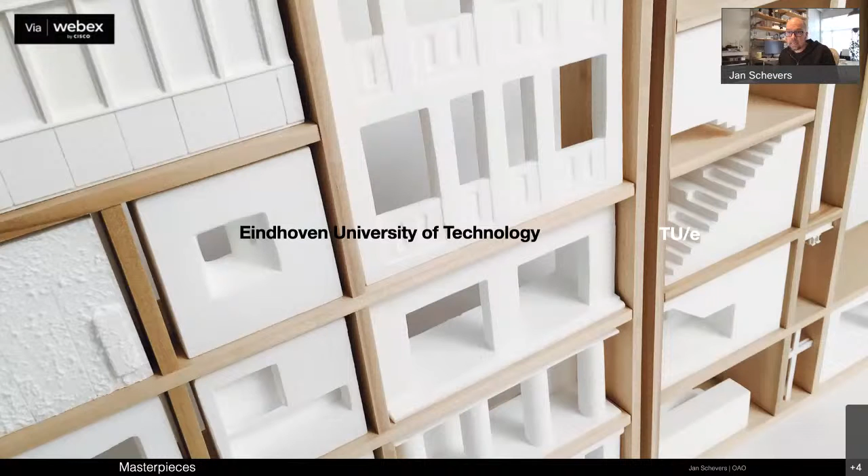This is also something in the background of these two first slides you see: a sort of object I made some time ago, depicting a lot of architectural baggage that I take along with me. This is where I find both my work at the university and my work as a practicing architect come together. My work at university allows me to keep digging into the work of other architects and reflecting on what that means for me as an architect, how I structure my design thinking, but also where I take my inspiration from. This was one of the things I tried to capture with this object you see here, and a little booklet to go along with it.

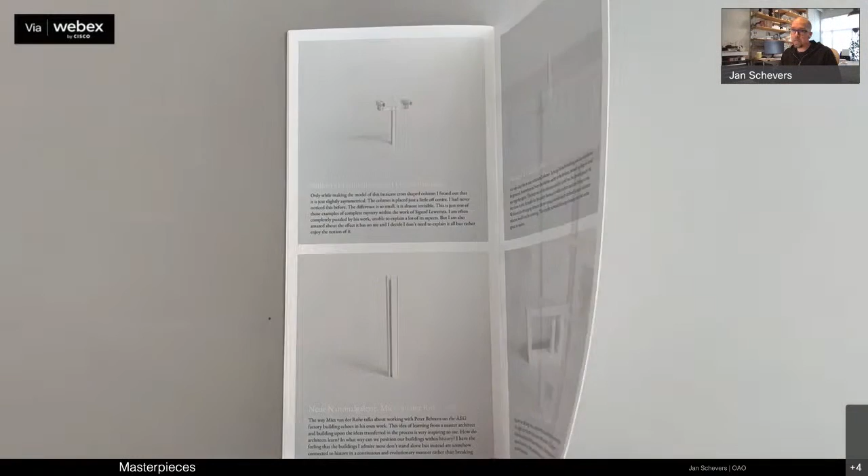It was by invitation of the Architecture Museum in Frankfurt, the Deutsches Architekturmuseum. They got together a group of relatively young architects from Flanders, the northern part of Belgium, and from the Netherlands, and grouped them together under the name of the Weaving Generation, I think it was called. That's also, I saw, in your introduction that you put online, a group that I feel quite comfortable with, indeed these kinds of architects that take inspiration from location but also from others. That's what this object is trying to do, taking fragments of other buildings that I carry with me, of architects that look over my shoulder when I'm designing my own buildings, and that inspire me.

So, for instance, here you can see on the left an image of a fragment of a medieval monastery in the south of France, Le Thoronet, which for me is probably one of the most inspiring buildings that I've ever been to.

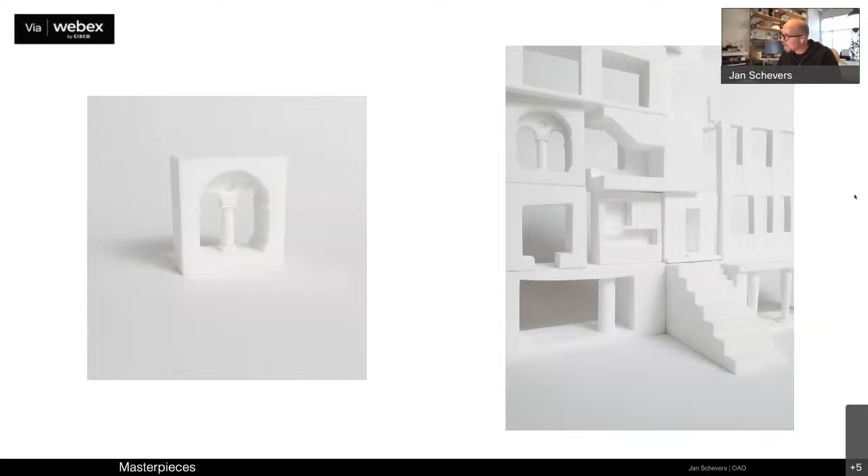But this is combined with, for instance, also one of the columns by Rudolf Olgiati or Peter Märkli, to name but a few Swiss architects.

Expanding on that, this is also one of the things that I love about working together with students so much. This is actually the project that Daniel and I met over, a seminar project, a research project into the work of Rudolf Olgiati, where for me a whole world of inspiration opened up.

Being an architect that, you know, in Switzerland of course all of you know him, but in Holland it's quite different. I think for all of my students it was really the first time they encountered the work of Rudolf Olgiati, everyone knowing Valerio Olgiati, but this was something different.

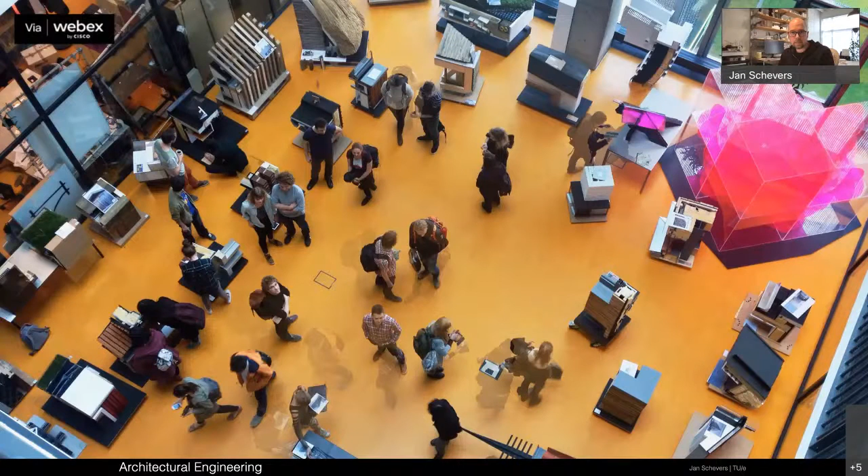Just showing a bit of the work that I'm doing as a quick introduction at the university. This is one of the core courses that I teach, called architectural engineering, and for that students are asked to make a full-scale detail of a fragment of a building such as this, where they redesign that building in a completely circular way.

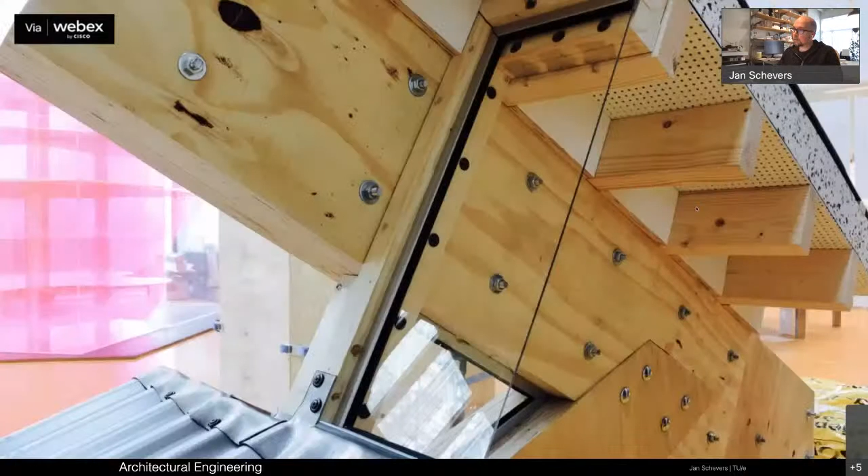So everything is completely demountable, reusable, rethinking every bit of detail, and then in the end also making it at a full scale. For me these are always really nice kind of experiments, also seeing the ingenuity of the students, taking it every year a step further.

This also even led to a giant material bank that we now have at the university, where students can recycle materials from last year because everything is demountable and reusable. Always a really nice, challenging course each year.

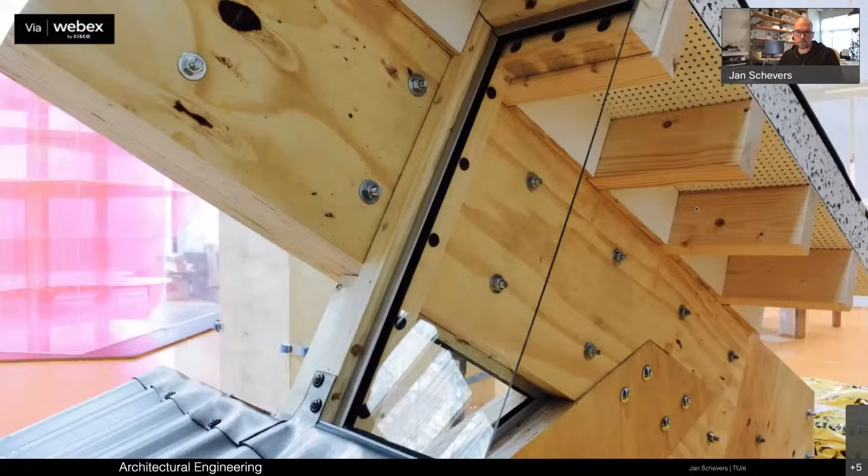Completely different project. This is actually a graduation studio, an ongoing studio where students would come in each quarter, and then other students, after a year, would graduate. So they would also be sort of apprentices or master apprentices to each other. That's also why this was called the masterly apprentice, where we asked students to take one building by a master architect.

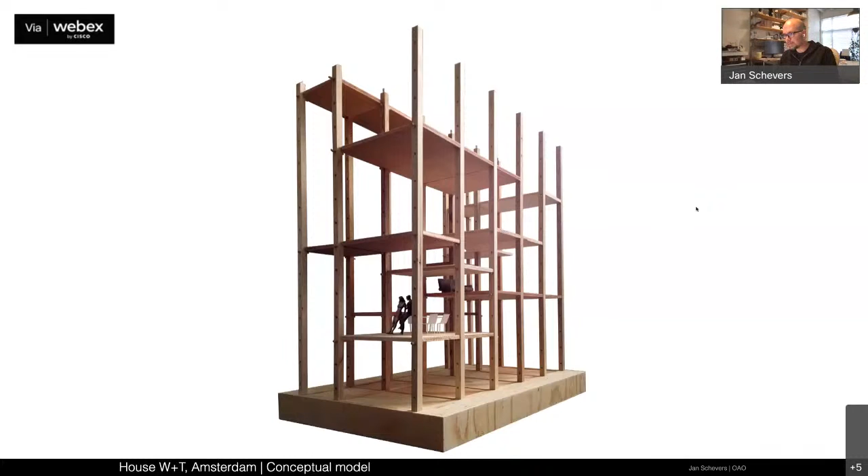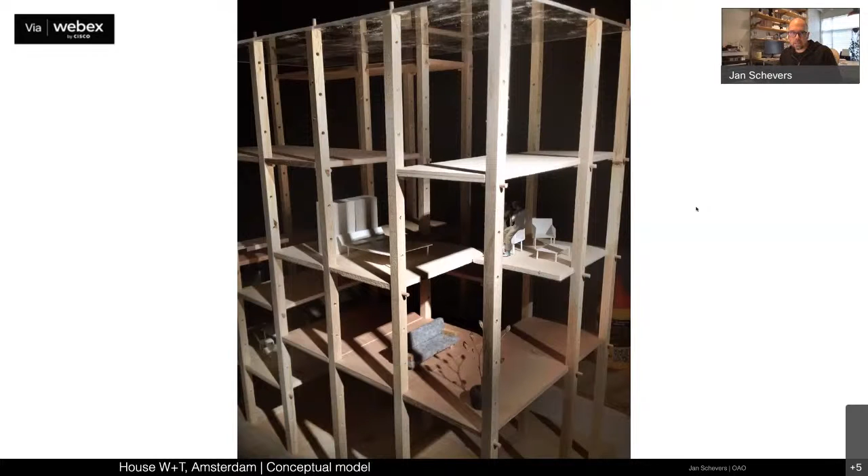One of the things I always do to get to know each other is to put something there. For instance, this one was for a project in Amsterdam for a private house, where we made this kind of conceptual model, because the clients were saying they wanted this very spatial organization in their house—to be able to look from the living room into the kitchen, and maybe to another floor and see people there. So we made this IKEA cupboard or something, and gave it to them as homework, saying, take this model and put your bedroom where you want it, and your living room where you want it, on which level. They started playing around with it, and that really got us the assignment, or the client. From this we started thinking about the structure and how to make it, and then eventually started building it.

Now, this was just a very quick introduction of a house, but it seems, if we talk about the design process, that it's like going from a conceptual image or a sketch, to a model, to a 3D model, and then to an actual building.

For me, it's never like that. It may seem like that now, if I reflect back on that project I just showed in Amsterdam, where it seems like one step after the other, and they all seem very coherent and to have to do something with each other.

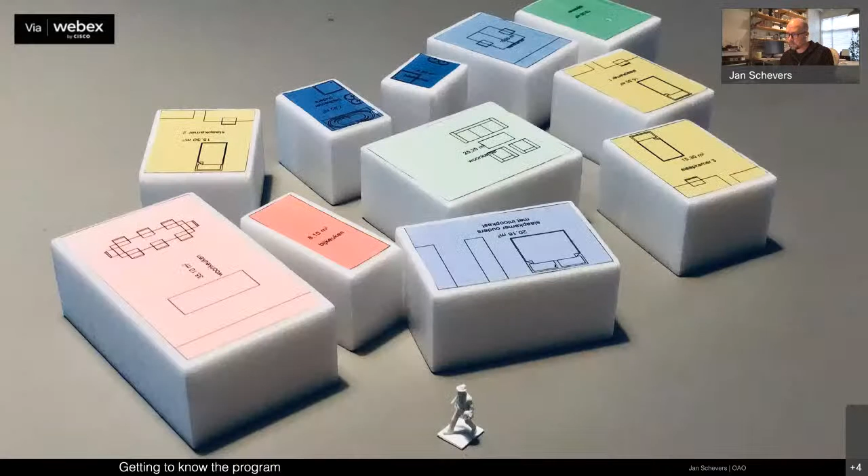So it's getting to know the client, but also getting to know the program—what should be in the house. I always kind of carry around these typical building blocks of a house program: how big is a living room and bedroom, and how big is a sort of kitchen where you can also have your dining room in it.

This is a 3D version of just building blocks, putting together the first idea of a house. Always very beneficial for talking to clients like this, because most clients cannot read a floor plan, let alone a section, but for some reason building with blocks is something they feel very comfortable with, and it comes very intuitively.

So it's getting to know the program, but also the rules and regulations that have to do with that location. In Holland we have this, called the bestemmingsplan, which is really all the rules and regulations having to do with that specific location, like building height and the form of the roof.

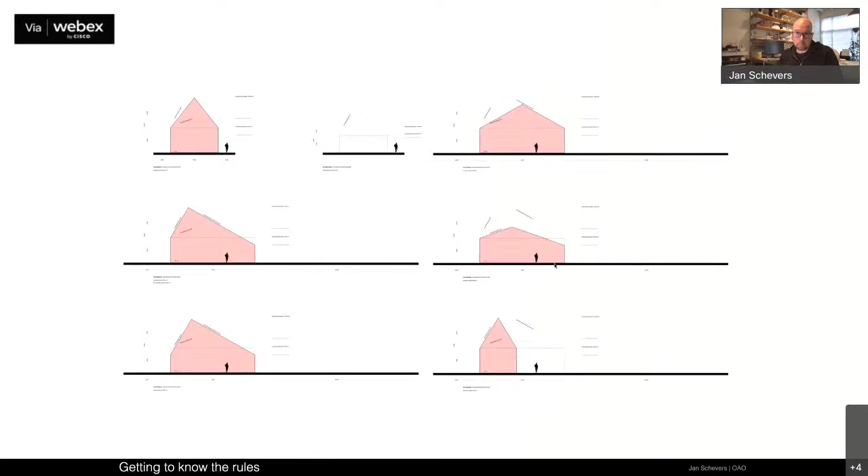I try to summarize all of these rules in these kinds of drawings. Like, okay, in this location it needed to have that kind of pitched roof with a certain angle and a certain height of the eaves and the top of the building. Then by playing around with these rules and with the program, I start making the first kind of sketches, and in this case, sketches really also mean 3D sketches.

Really playing around with foam models, sometimes also with gypsum, sometimes with other materials. But foam for me is just very easy—you can cut it very easily, and it looks quite nice immediately. It's really like trying stuff out in 3D.

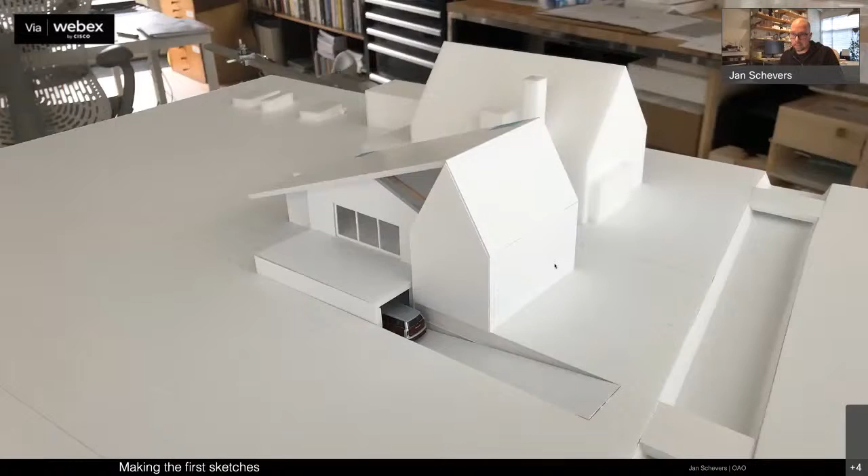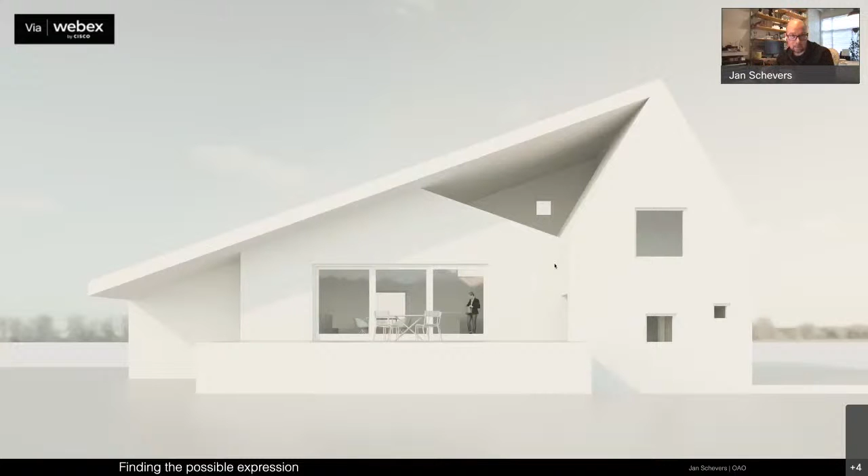In this case, you can even see that with those weird roof shapes the city was allowing us to do, we started making this composition of different houses and putting it all under one roof. You can immediately see it comes really from playing around with that foam board model, which is then translated into a 3D model, seeing what the potential is like spatially, and also being able to look inside and see how the light falls in.

For me, that was also the moment when, after our first talks with the client, this was the first time I started presenting them with something of a design.

The nice thing about private clients is that they're very direct, based on their gut feeling or intuition, and that's something I stimulate. In this case, though, this was their first reaction: they said, no Jan, we really cannot see ourselves living in it. You don't even know why, but in this case the response was not good.

This was actually a really good thing for the project, a bad thing for him and his family of course, but for the project it was good, because it meant that where we first had this plot—which was really hard to build on, since the north arrow points this way—and as it is also in Switzerland I'm sure, it's quite important to make the most use of the sun coming from the south.

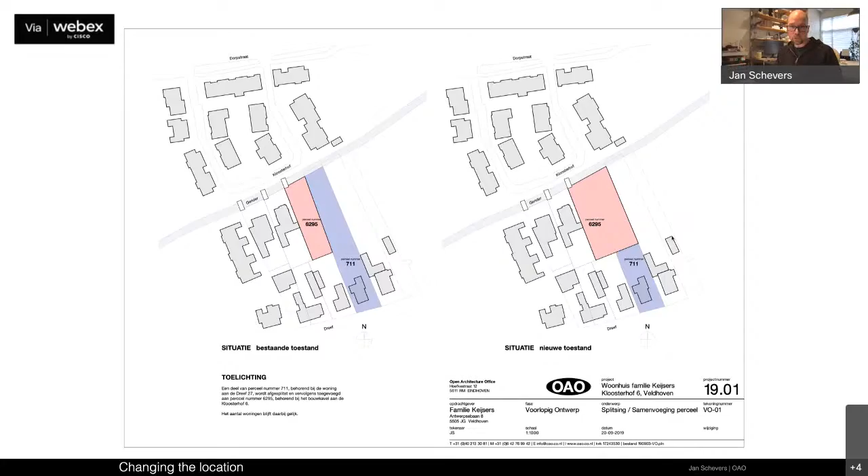So they did that—immediately tore away all of the fences and greenery. It also opened up the plot in a different way for approaching the building.

So basically, I could start over again with the entire design process, which wasn't a bad thing because we weren't agreeing, or we hadn't found the right approach to the design anyway. They weren't happy with it.

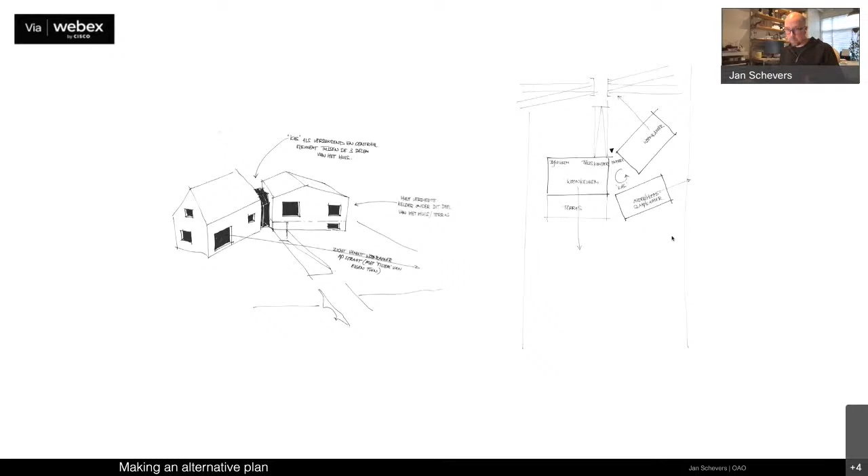So I started just sketching, seeing what you could do with the new plot that was given, maybe with multiple houses. I think I was still kind of stuck in that idea of the pitched angle of the roof and having these multiple blocks coming together, now in a completely different way.

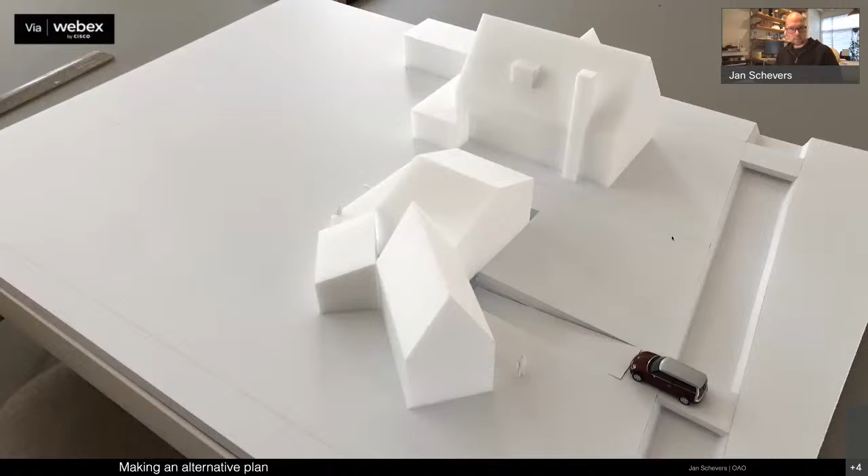At a certain moment I tossed that aside, saying okay, maybe it should be something completely different—something like this, which also follows all the strict rules and regulations from the city, where mainly the low gutter height was really a thing that kind of bothered a proper design.

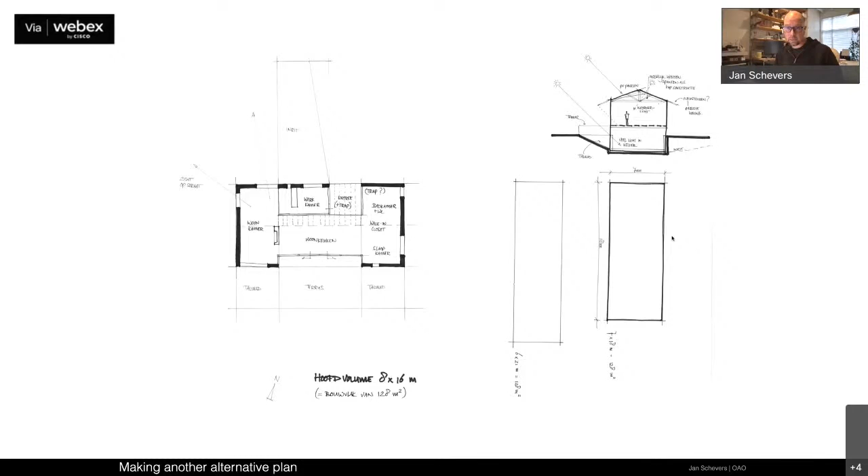Then also sketching in floor plans, but especially in sections, is something that I always love to do, just exploring the spatiality of it. And also these renders, seeing like, okay, what can we do with the quality of the interior, and then what is the relation from the inside to the outside.

Also working with references, this kind of reminded me of a project that you'll probably also be well aware of, which I found really nice to strive for, something like this. Again, going back to the clients, seeing how they would respond to this. And no, unfortunately, this was really not up their alley. And they were like, no.

Still nothing to go on. But the nice thing of this is that it gave us, at least now I know what they're not looking for, and for me, it also didn't fall into place yet. So it gave us kind of like this dot on the horizon or something. What are we looking for together here?

This also coincided with my holiday. That was really up until the moment that I was working on it, just before going on a holiday. And then they said, no, let's not do this. And I thought, okay, then let's take a holiday, let's take a break and start afresh.

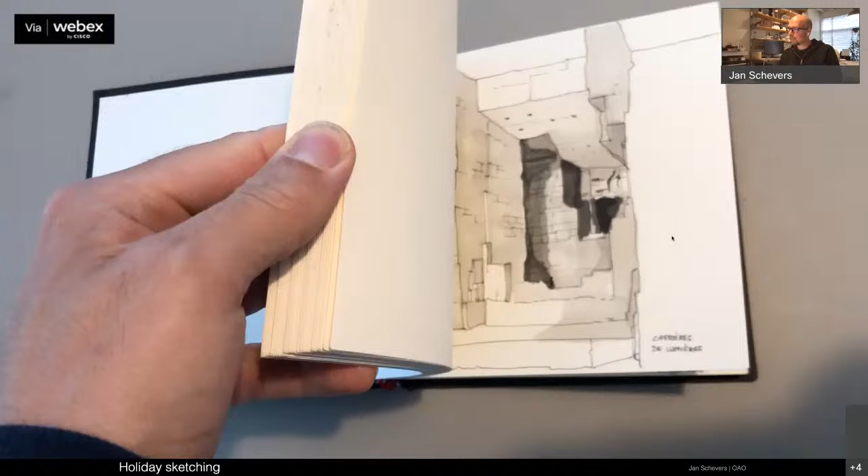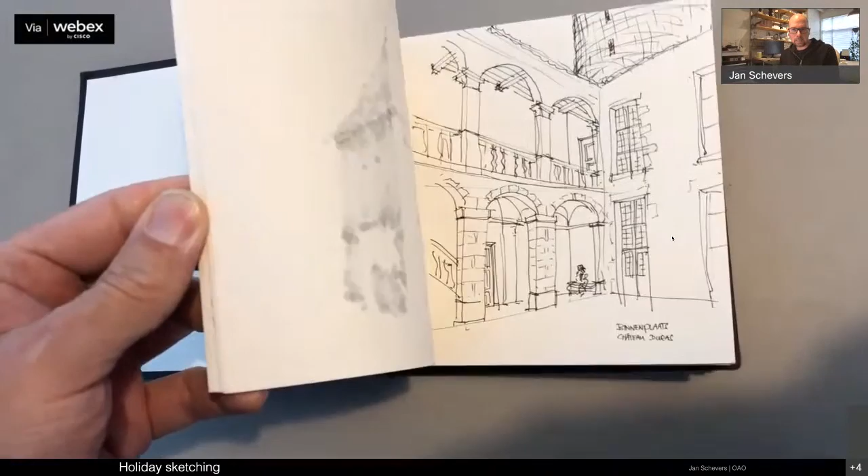One of the things that I always like to do while I'm on a holiday is to make these kinds of sketches. Everywhere I go, I start drawing what I see, and it really helps me to look in a different way at stuff around me. But it also opens up my mind, I think. So in this case, I also took along my sketchbook, and sometimes to the dismay of my wife and daughter, I'm always kind of working.

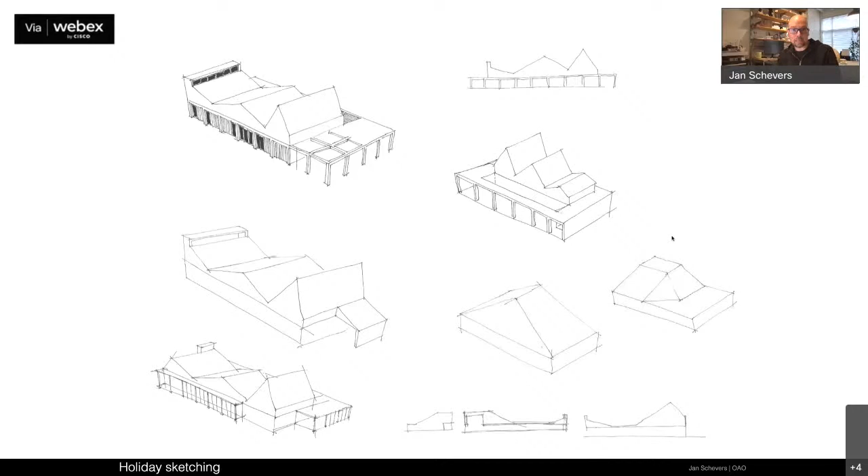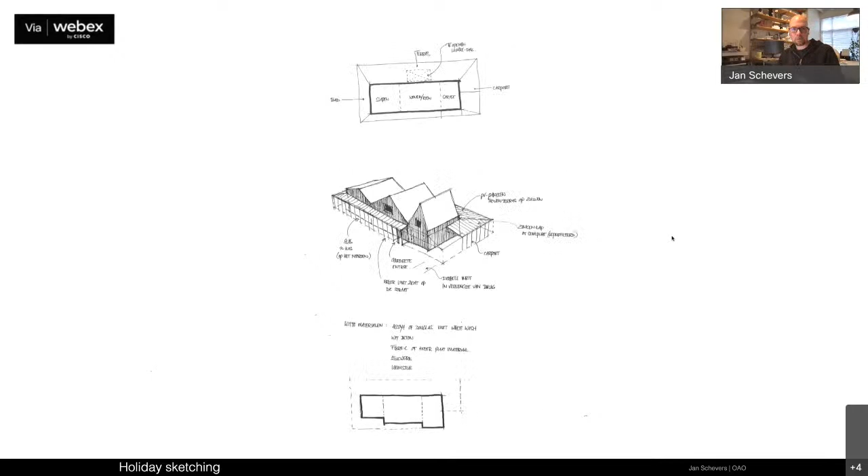Well, not always. I also have a lot of fun, but working for me is also a lot of fun. So sometimes it's really hard to let go of these kinds of, especially when I'm in this kind of zone of getting my thoughts on paper. And so I produce like a ton of these sketches while I'm drinking wine in the south of France, in this case.

And now looking back at these sketches, I can see something happening there also, where, for instance, like with these ones, there was something very personal to the client coming into the project, which you can recognize quite literally, like these greenhouses. So I figured, let's take really the passion of the client and make it into the heart of the building, place the greenhouse really at the heart of the building.

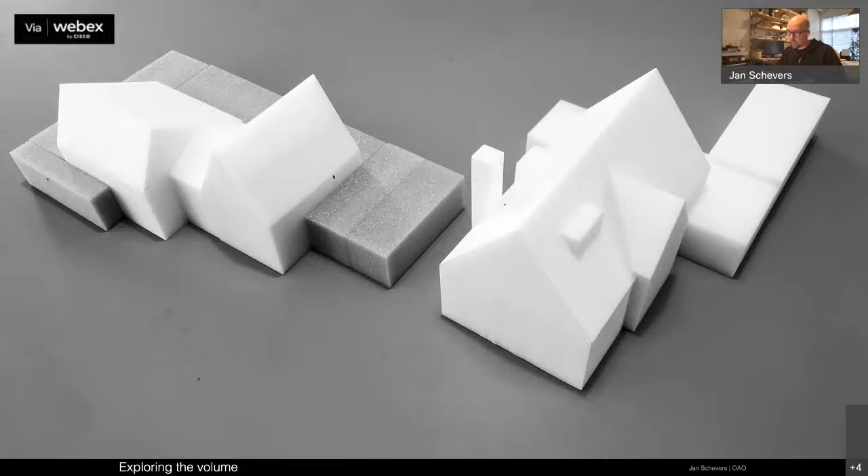And that was something that worked really well in terms of floor plan, where you can see like a greenhouse here, kind of organizing the entire floor plan around it. But also it started to do something, and here on the right is the existing building that was next door. This could be something of the arrangement of the new building.

A little worked out in a bit of a different way, where the silver part would then be the greenhouse. And this was actually the model that I then took to the client. And by now I was getting really nervous. Like I was thinking, okay, but this is now becoming something that I feel quite good about.

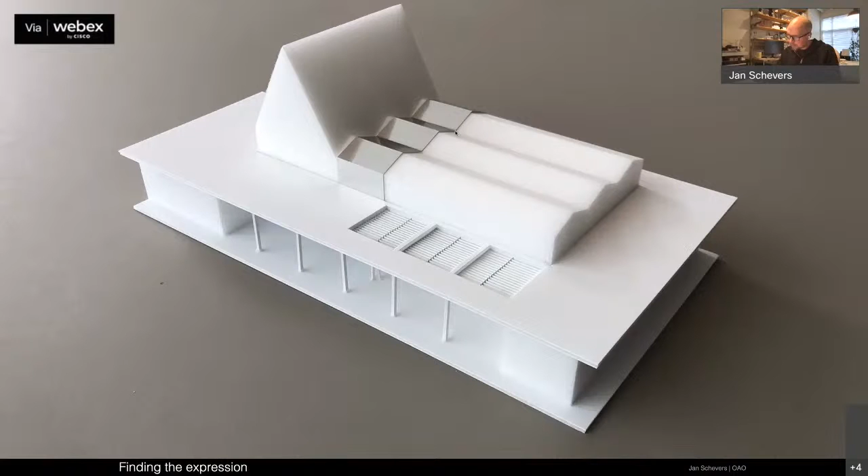And that I have a feeling that we're somewhere now. And so I was really nervous to show that to the client. And their response was just, yeah, that was spot on. They were really like, now you've found really what we're looking for. They didn't even have a clue what they were actually looking for, but for some reason it all kind of fell into place, essentially.

So that meant for me to start working on these kinds of models to check, okay, what kind of building is it then going to be? Also to check whether what that's going to do for the interior. And this was something that I was also not completely happy with. So I tried to also remain very critical, even if at a certain point you think, now finally we have like a way to go, or a kind of conceptual approach or something. Then still I try to be very critical of, hey, what am I doing, and is this really working?

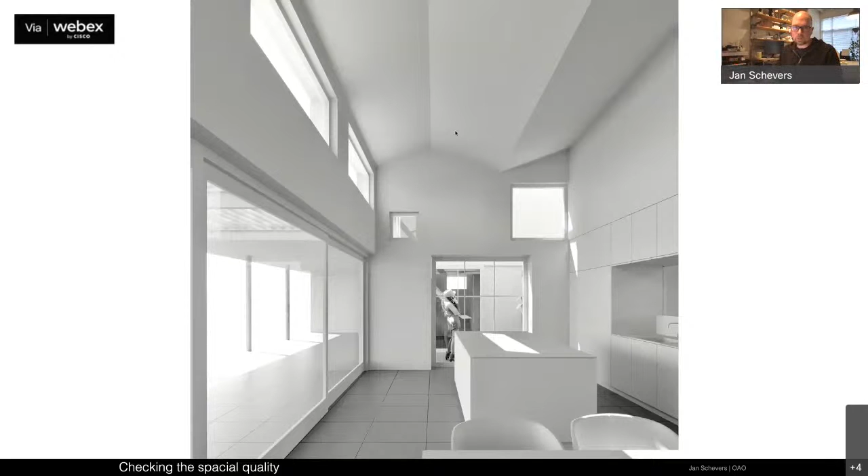So in this case, the spatial quality of this is the kitchen / dining room. That wasn't falling into place, where I thought that, and then I start experimenting with it. What does that space do? What should the roof do? How do I want the light to come in? And that's where also these kinds of 3D models help me out a lot.

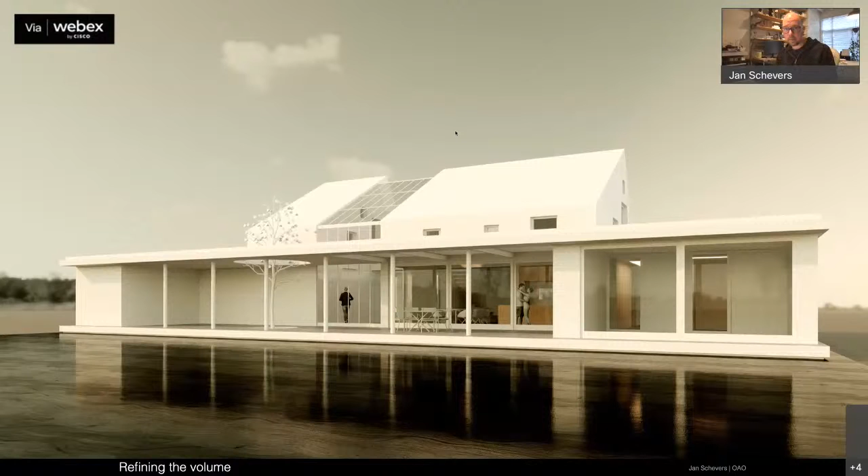Also to check, what does it do towards the garden? In this case, opening up the building. This is also something that the client wanted very much, like this in-between space, where they could sit outside also long evenings in the summer or late summer or even autumn.

They loved sitting there with a group of friends watching the Tour de France. That was really like a dream that they had, sitting on their porch watching guys riding their bikes down big mountains.

Then seeing how that would work with communicating to the front, and then with that greenhouse in the middle where also the entrance is going to be made. This is really where everything started to fall into place.

So I start making these kinds of drawings, because besides working with physical models, everything you see is really the 3D model. In my case I use Archicad for that, so all of the drawings I'm going to show are also just versions of that 3D model.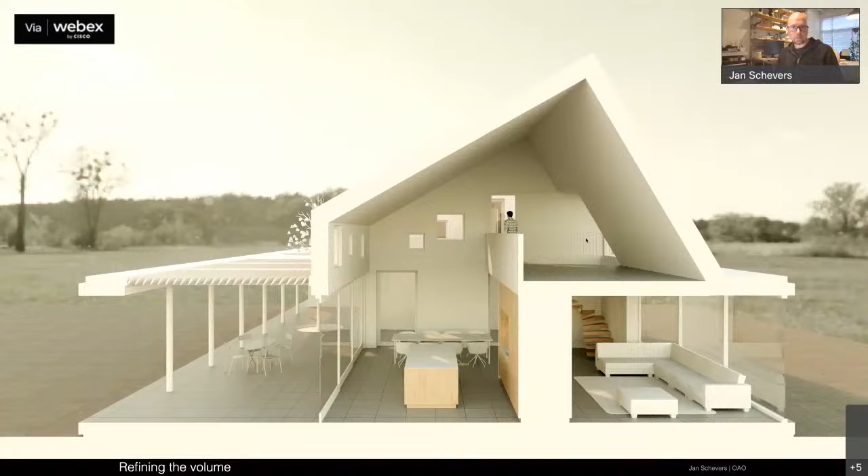In terms of not trying to do the same thing as the neighbors with the brownish, almost purple brick -- I really don't like that kind of brickwork, and in this case there are many nicer bricks, but it would really conflict with the ones in the surroundings. So stucco seemed to be a preferable option.

So these are really details that I try to keep in mind while at the same time being very practical about it, and I start refining the 3D model a bit more, also to convince the people from the city.

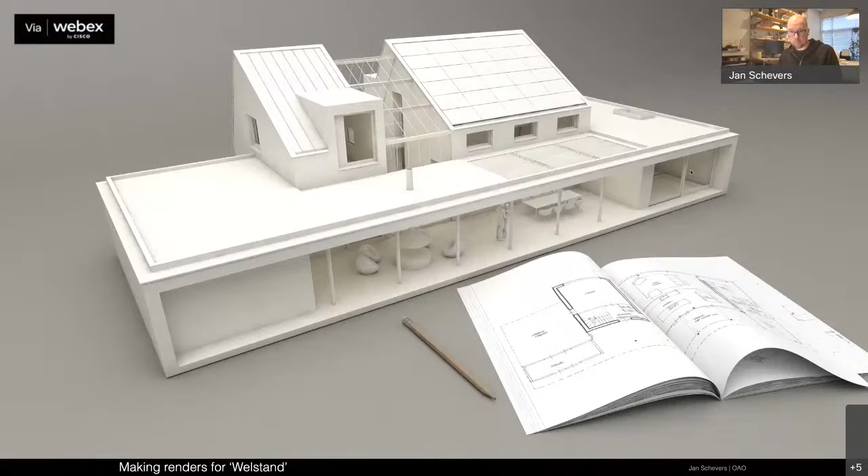We have something called welstand in Holland, which is the beauty commission of the city, so to speak. They have to approve that this really fits into the surroundings, and that they like it.

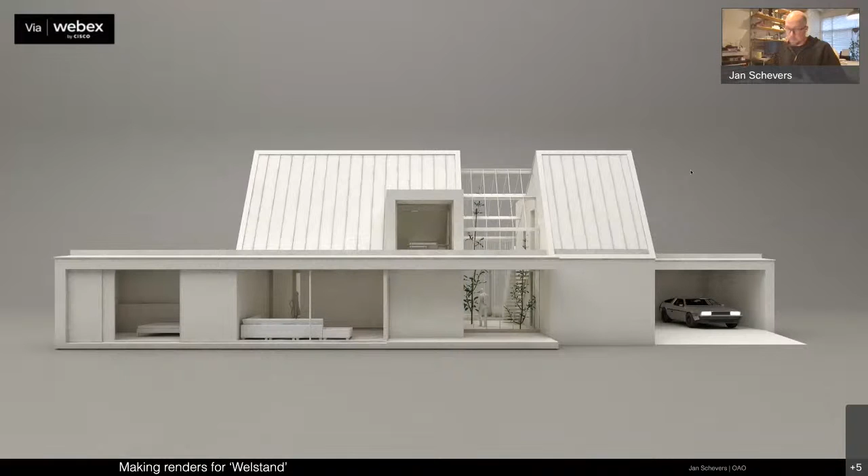So I make these kinds of images to convince them of how the building is going to communicate to the outside, and these kinds of drawings also for the building permit, with this kind of level of detail now in the floor plans.

I love making all of my drawings myself. This is really where I control each part of the design, down to the, in this case, 1:5 scale details.

This is still quite an early stage of the project, but by really thinking through these kinds of details, I think you can make or break your project. So I like to also be very much in control there.

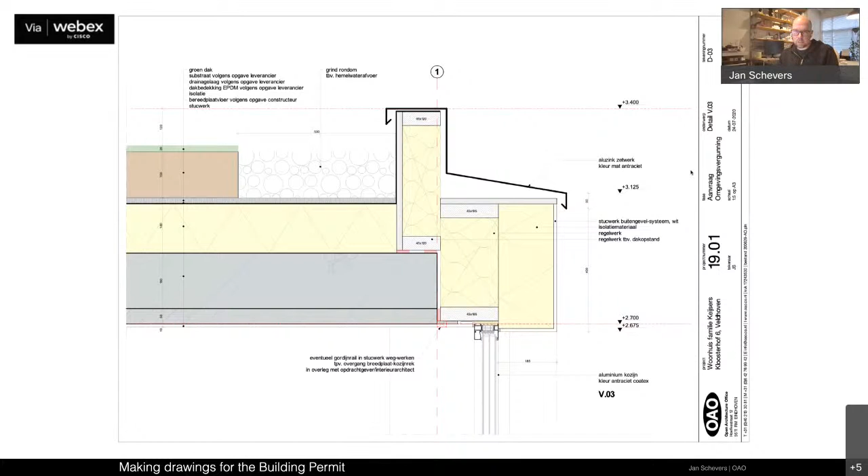Also quite some cubic meters here. I think for Swiss, to put it in a bit of perspective, building in Switzerland is just -- the budgets that you guys are used to is something that we Dutch architects can only dream of.

Of course, not everything is about making expensive buildings. The most cheap buildings are sometimes the most beautiful ones, but it can make your life a bit easier as an architect. In this case, or in all of my projects, it's always about finding a balance between what we can spend in terms of money, what we can get from it, and always discussing with the contractor.

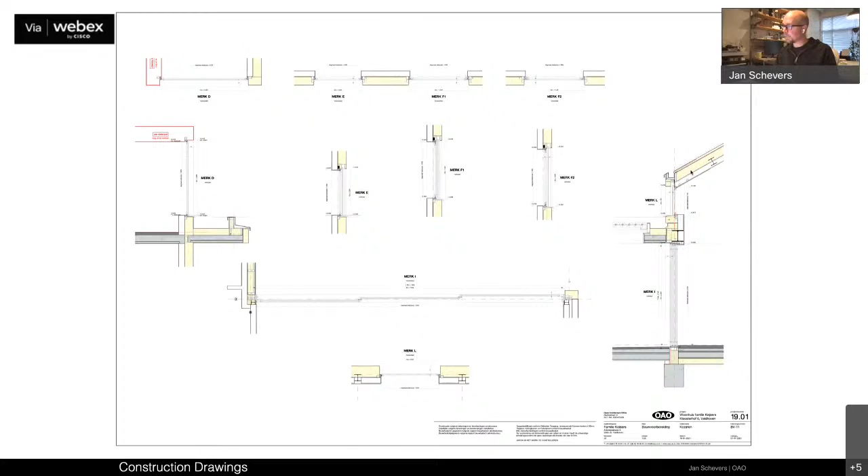Here I also took it upon myself to do all the details of everything around the house. I'll show a couple of these drawings, made at a scale of 1:20, but if you zoom in on them, each has 1:5 scale info on them. All of the window frame details were so important, and so much was going wrong with the supplier's first initial drawings, that I thought I'd have to make all of these drawings myself. It actually allowed me to really control everything within that project.

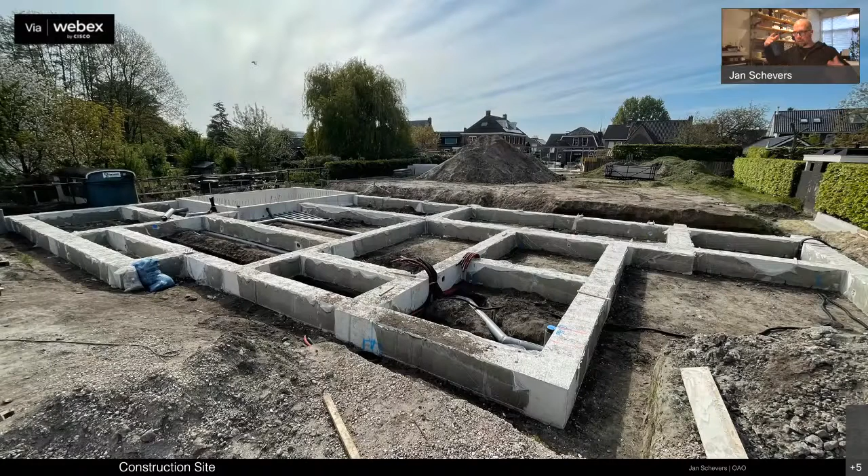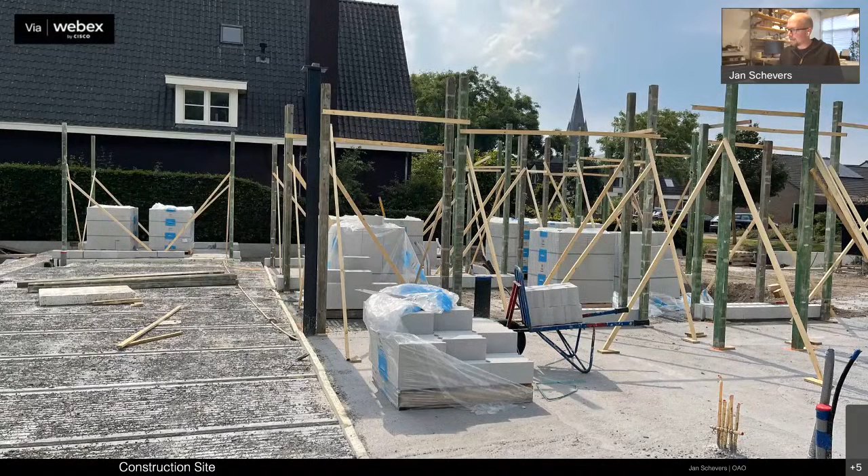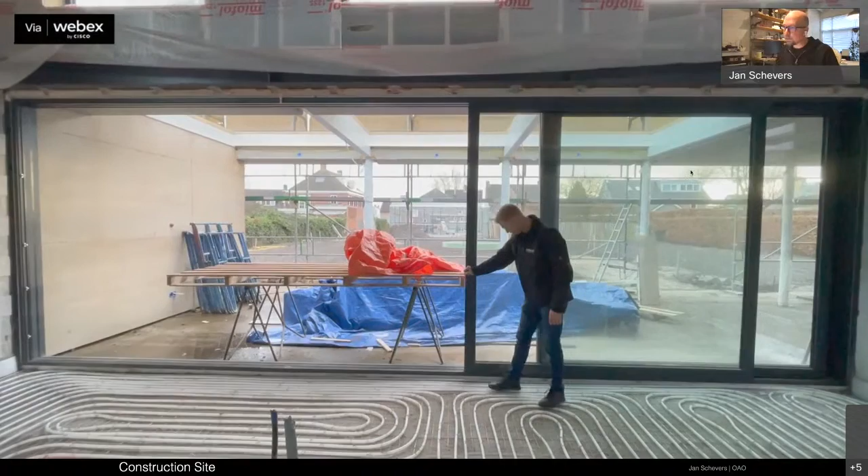And then the most miraculous thing happens for me, when the entire thing starts to become a reality - starting to lay the foundations. In this case it was a more traditional way of building, with limestone bricks and concrete floors, and big sliding doors creating this connection between the kitchen, dining room, and the outdoor terrace, which is covered by a louver system you can open and close. For me it's always such a joy to walk around the construction site and really see the ideas become reality.

In this case I also took a lot of students to the construction site. For a lot of them it was the first time they actually set foot on a construction site - most of them were second-year students - and it was a real eye-opener, indeed.

Now this is a project that's still under construction, which I think is also one of the most interesting parts of the construction process, or of the entire process - seeing the actual construction happen.

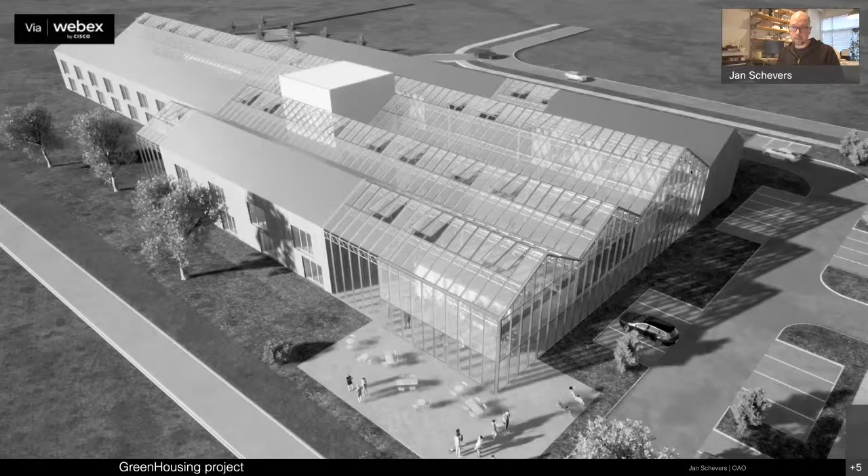In this case, while we were working on this, the client was actually thinking of developing a bigger project around the greenhouse. This is something we're working on right now as well, partly because they were quite happy with what we were doing together on their house. I think this is going to be really exciting, with the greenhouse also supplying energy for the housing around it. We're working on that right now, with some interior images as well.

And Daniel, I see I've already been talking for like 42 minutes. Would it maybe be a good idea to have a quick break, like a 5-minute break? I also need one to refresh my mouth. And then I have, I think, maybe half an hour more where I want to show some other stuff. Is that okay? Definitely, if you need some water in the break, it's definitely possible to stop for a second.

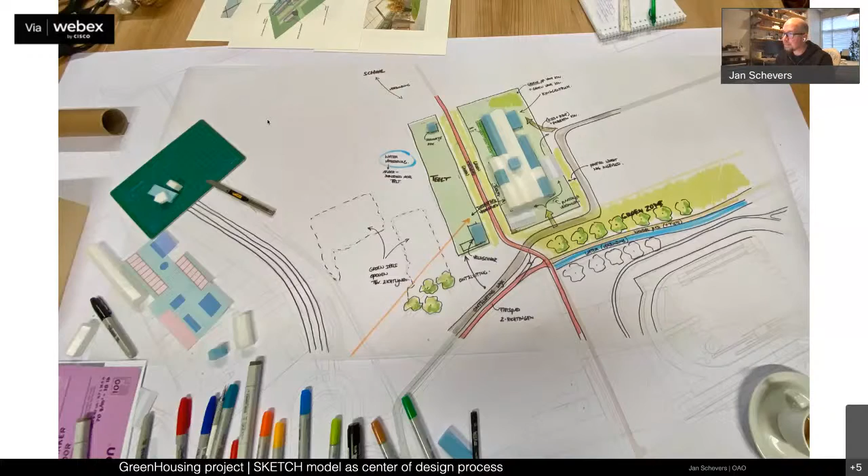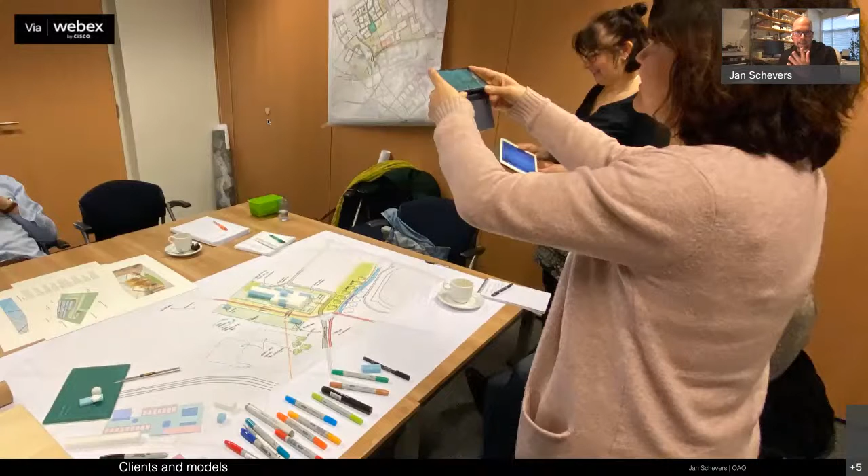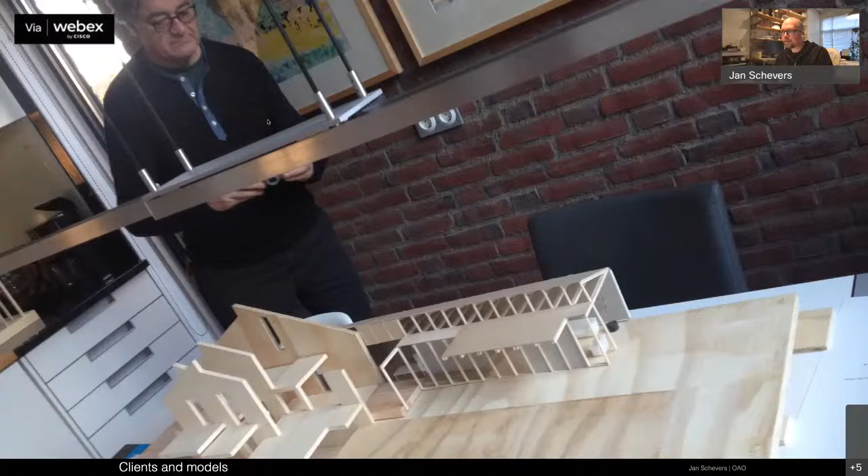And this is also a bit of an intermezzo, which is a secret kind of collection that I have of photos of people that I work for, taking photos of the models that I make. In this collection, you can see how important it is to use a physical model like this in communicating it to the client, getting them involved in the process and making a connection with them. I think none of them know that I actually do this, so try and keep it a secret. But I really love seeing how clients interact with it and how things can then fall into place.

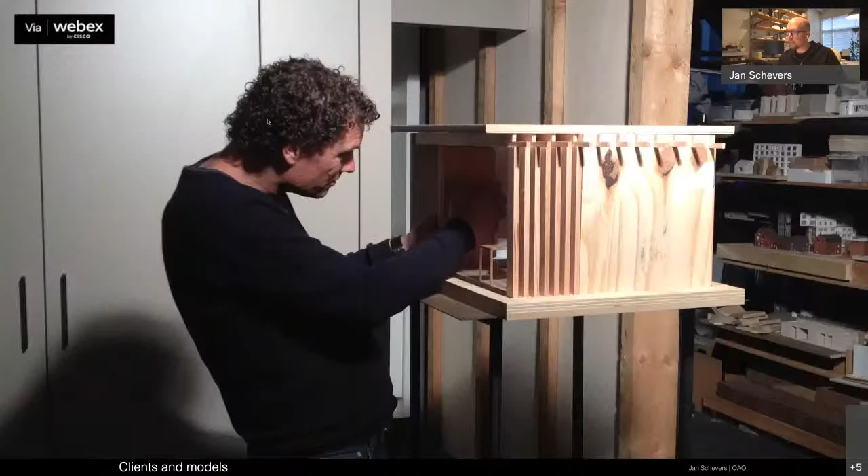This is also something, and now I come to another project which I briefly want to show, which I actively use in my communication with clients, that I quite recently got more of a grip on, which is something I want to discuss right now. So it's really about how to create alternatives and think in alternatives while discussing the project with my clients.

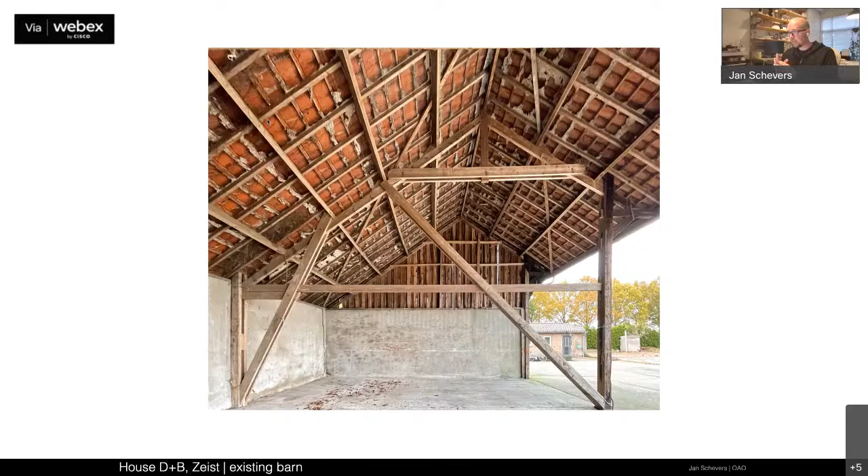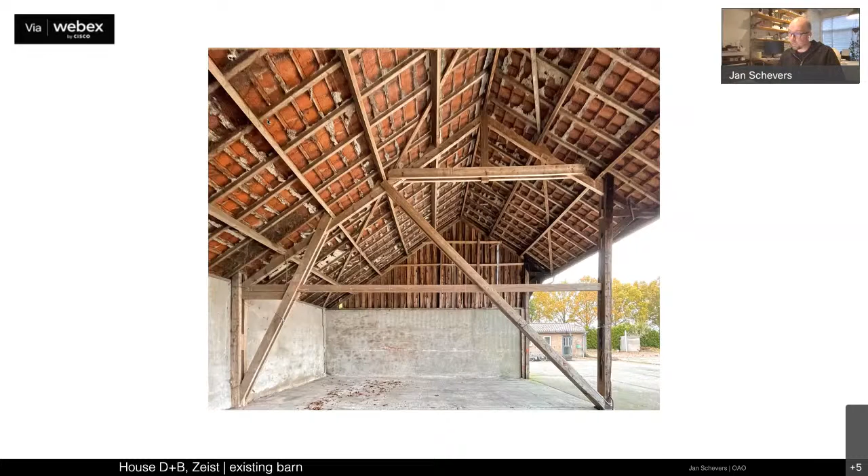In this case, the project that I want to show you kind of starts with this. It's for a private client, a house also, but now in Zeist, which is more in the center of the Netherlands, quite close to Utrecht. Really nice location, on a remote area outside of Zeist, where there's an apple orchard around it. I already know the location quite well because a couple hundred meters away, I already recently built a house for other people. And then these ones came to me just because they loved that house so much, and that was friends of theirs. They said, 'Okay, now we want you to design our house as well.'

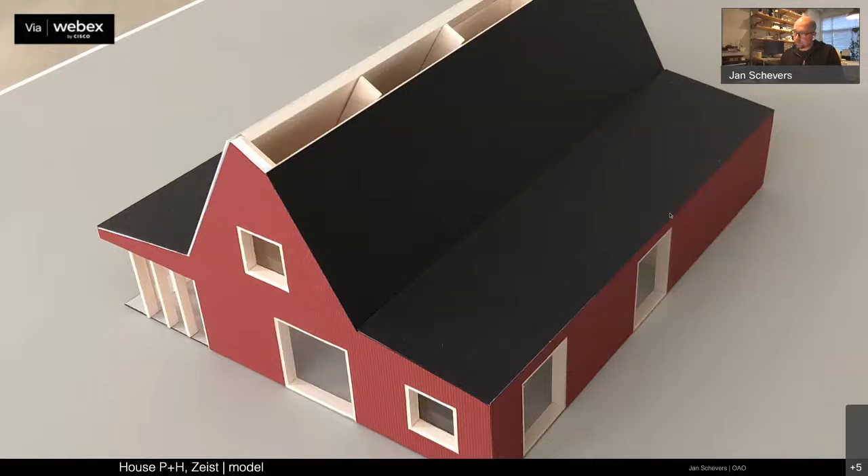Really starting with that material palette in mind, and again with rules and regulations of the location, that's really where this house, or the shape of the house, but also what really determined the presence of it. These are some of the early study models, also exploring what it means to have this kind of wood all around you.

In Holland, we're definitely not used to building in wood. It's all brick and a bit of concrete, but never the way that you see it in Switzerland. Not that high quality, but certainly not this kind of sort of being enveloped in wood.

So that was also something that I wanted to test with this model, whether the client was really aware of that, and also to get to know the rules of building with such a material. It's really almost like building a model, but on a bigger scale. Then also here, moving to 3D to test the material qualities, but also in more detail the expressions of the facade.

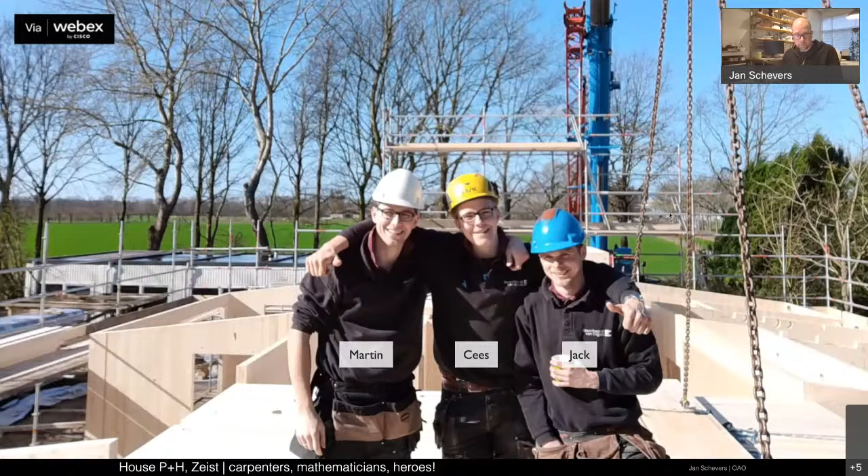In this case, the entire thing was produced in Austria, prefabricating these CLT elements, and then put together by these three. Martin is the guy who normally works in the office of the contractor, but he was so excited about the house that he said, just for this once, I'm going to be on the construction site the entire time.

that they're putting together the CLT. Then Cees and Jack, they were the carpenters there. I also call them mathematicians and heroes, because they really made the project the way that it is. I always love discussing my project on the construction site with the people making it, because they know so much more about it than I can ever know. I always try to learn from them a lot and work with them to solve any issues that we're still running into.

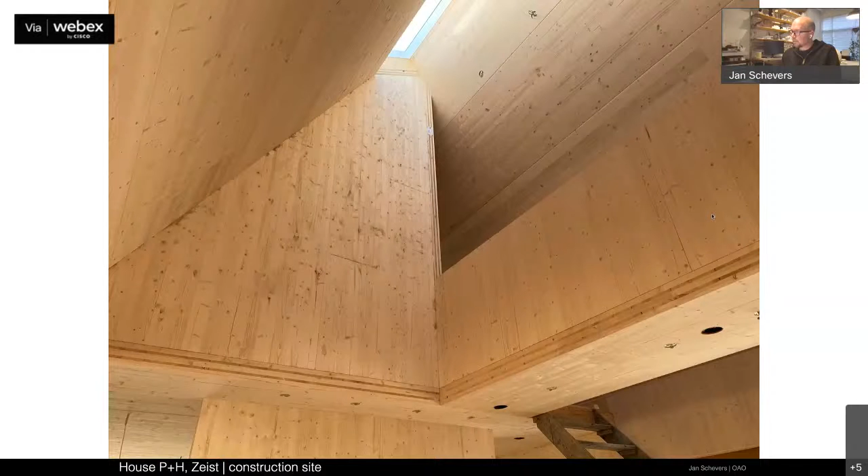And yeah, really nice. This is something of how it looked from the inside during construction. In the end, all of the CLT remains visible, so this is something you have to think very carefully about, mainly in terms of the installation and things like that. This is also still during construction, so nothing finished yet.

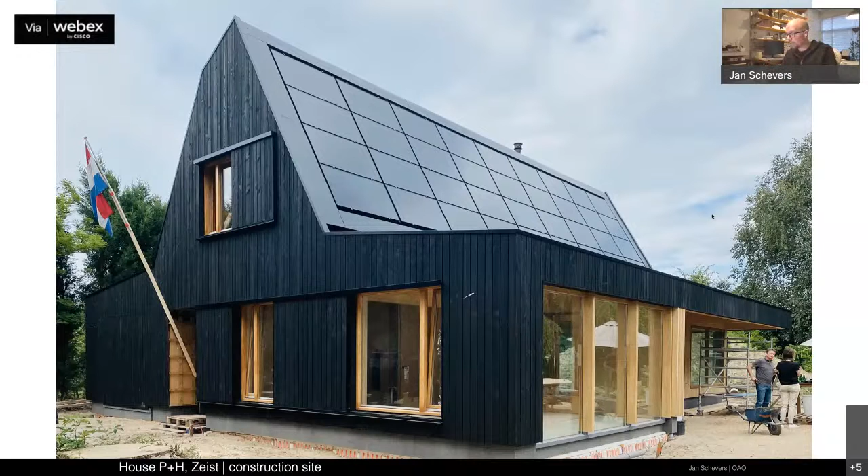So in this case, I also started with just getting to know the context, getting to know what we could do there and what the plot is. So I started making this kind of model at a scale of 1 to 200, first the barn and then the plot where we could build, and then trying to get the massing in there.

In this case, already taking the client along with this kind of model with a couple of different options, where we would say, okay, we have the possibility to build such a volume with the rules that the city is imposing on us, or something like this. And we have maybe the possibility to also link the program of the house together with that of the barn. You could imagine that in that barn, you could also make something of a working space, or sort of extension to your living space. Or you could just demolish it, but that's something we can always do.

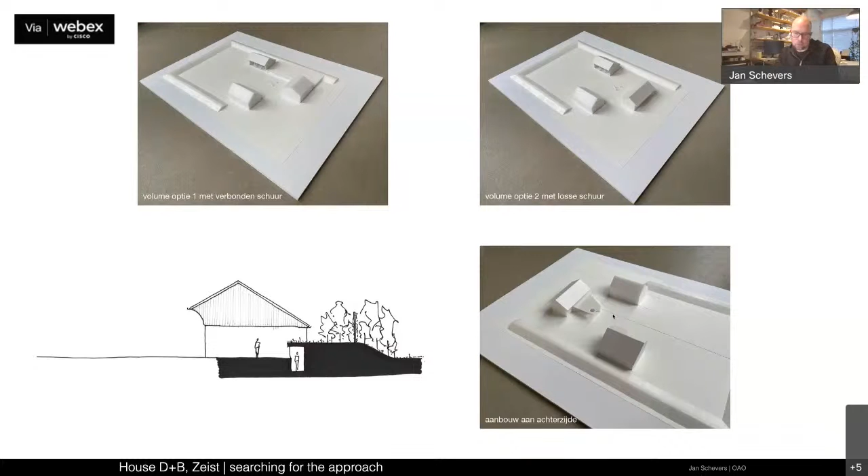And discussing all of this with the client actually really worked, to really show them a couple of options, take them along in the story of what I was seeing here. To show them, in this case, really two completely separate options for the design spatially, testing whether they would feel comfortable in a house with multiple levels, something a bit more similar to the project in Amsterdam that I started with, where you could look from the living room into the kitchen and back, and then maybe into the bedrooms. Whether that would be something they'd feel comfortable with, or whether they would want it all more on one level, so to say.

And actually seeing this really opened up a lot, or opened their eyes in a certain way. They were actually really happy with both of the options, and they said, can you not kind of combine them, just push them into each other? And that's something I literally did at that point. I just said, okay, let's see if we can just merge these two projects into each other and see what then happens.

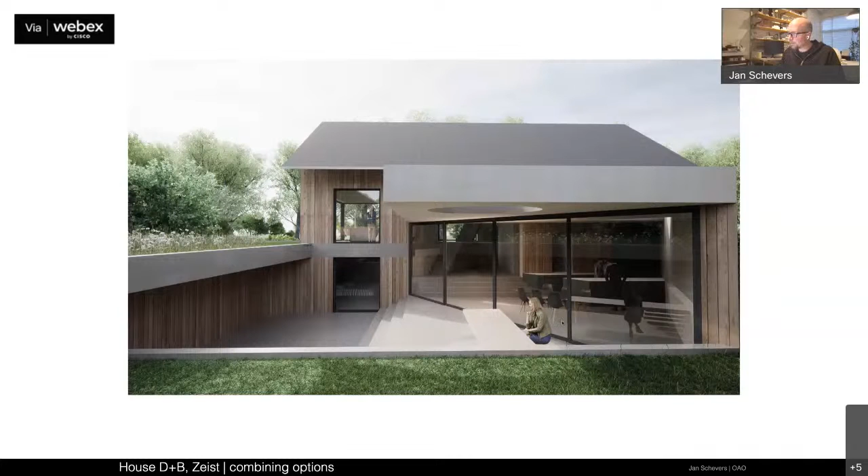At first I thought, yeah, that's going to work. But then again, looking critically at what came out of that, spatially, it really didn't. There was something wrong with this space, where I was thinking, oh, it's now getting too crowded and too dark, and things are really colliding or clashing. Where at first I thought, oh yeah, this is nice with this kind of triangular extension that worked, but all of a sudden it didn't anymore.

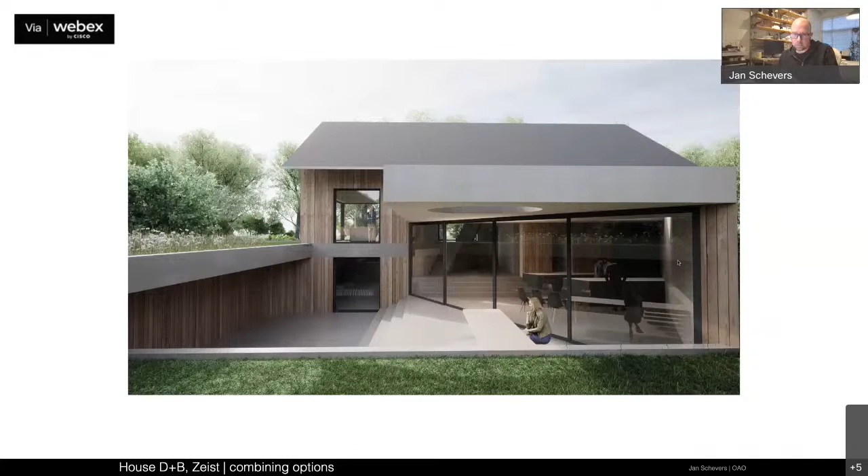That's really where I found the kind of limitations of working in a 3D model like this in the sketch phase. So sometimes it's really good to open your mind in a different way. So I just tossed everything aside, or at least I started making this into a model, and then seeing where this kind of intuition is coming from that it's not working yet, and trying to figure that out.

And it really had to do with that sort of trying to do too much into one project because of the merging of these two different options.

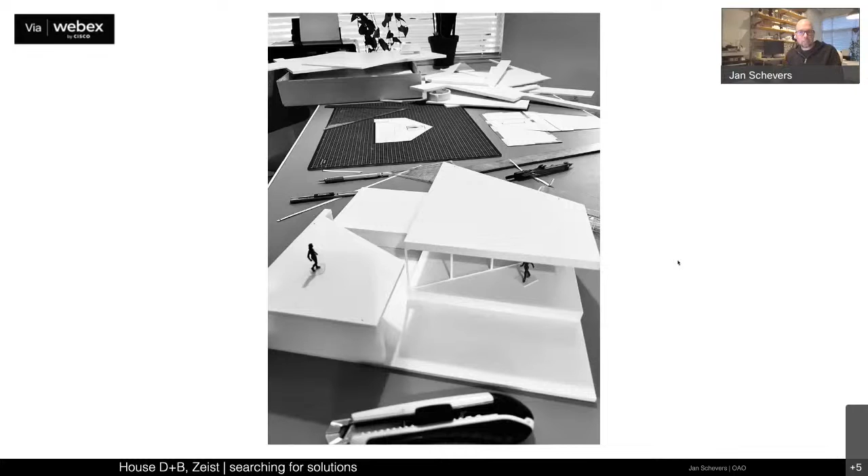And that's where I also started thinking about maybe taking another step back and really start thinking. Whenever I start thinking, I start sketching. That's something that kind of comes automatically, or that's so intertwined with me. Whenever I start talking to a student of mine, I need a piece of sketch paper or note block and a pen.

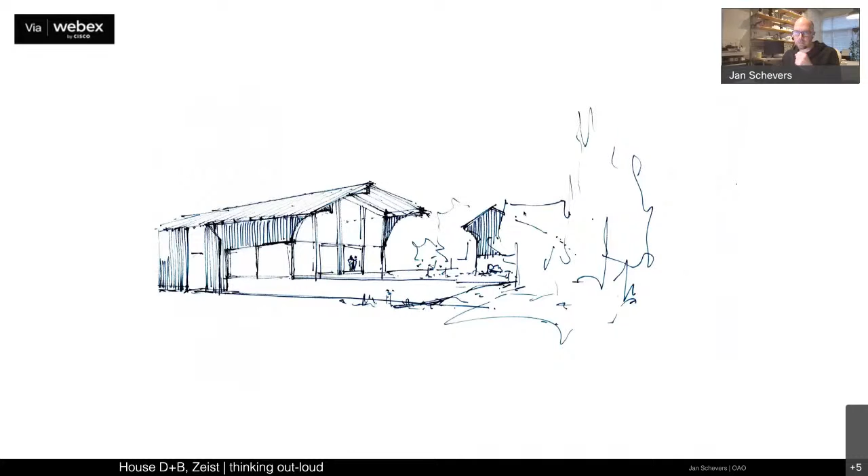And that's something where after the sketches, I started really messing around with the foam model again, and this came out of it, kind of flipping that edge around. And actually here a lot of stuff fell into place, because this also helped me to commit to the rules that the city was posing here.

They were saying, okay, you can build here, but the edge of this gutter needs to be, I think, at 4.5 meters, where ideally you would want it to be at 6 meters, to be able to really make like a first floor completely. But by making a sort of cantilevering roof like this, the actual gutter is now at 4.5 meters.

So this made it much more easy to organize the entire program in there. And then still, you know, from the first option, the multiple levels really found its way into the project as well, which was also something that at a certain point I couldn't wrap my head around anymore. And that's also why I needed this model to see how all of these stories link together.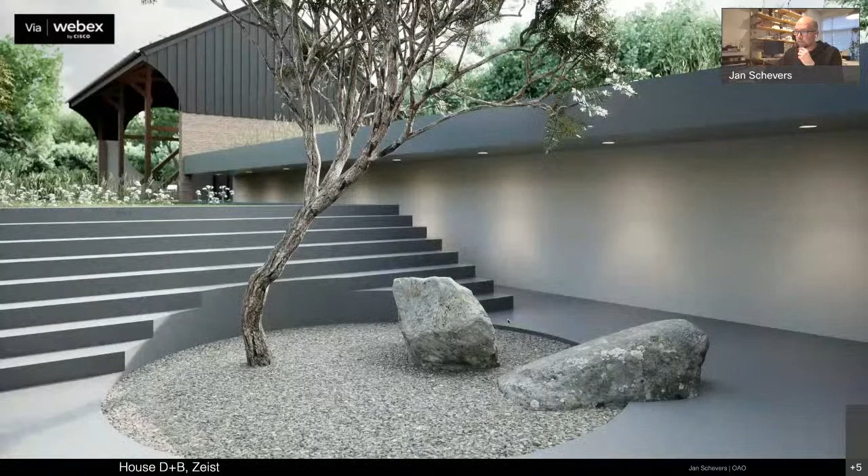And that's when I also started returning back to the 3D model and making these kinds of images, really to explore what's going on now with interaction to the street in this case. What happens if you have this kind of raised bit of the garden where your living room looks over that, or a lowered piece of the garden where the kitchen and dining room open up into, and that creates also these views to the old barn.

Which at a certain point we also started cutting up. Or how does it then present itself towards the street, in terms of windows, or in terms of privacy. There's a bathroom behind this kind of very small patio that you can see here.

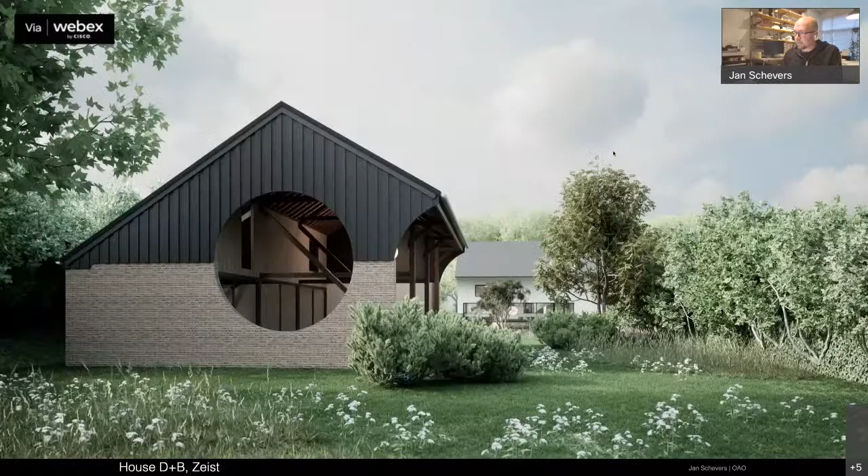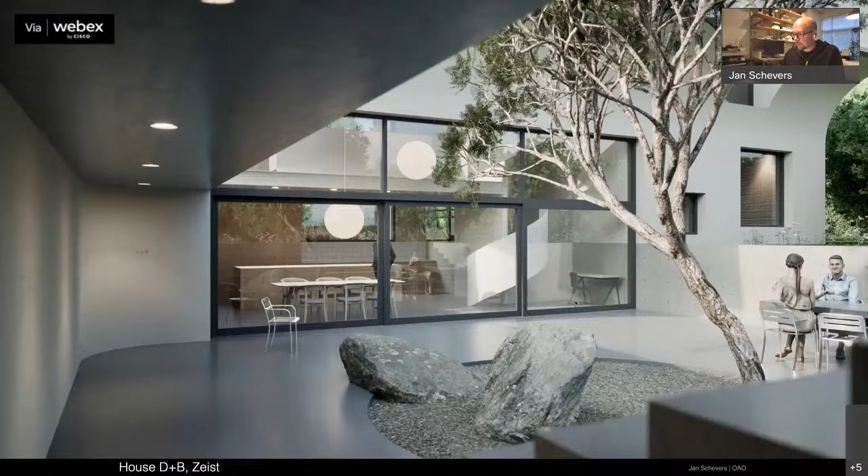And as I said, cutting up the existing barn like a Gordon Matta-Clark kind of sort of insertion into the building, seeing how you would move around and be in that sort of lowered space. So this is 1.5 meters lower than ground level, and then connecting it to the kitchen like this.

And of course, the weird shape beneath the cantilever roof also opens up possibilities for making windows like this. Again, I think this is quite a literal reference for me, at least, to Rudolf Olgiati, kind of Trichterfenster things, something that I definitely learned there.

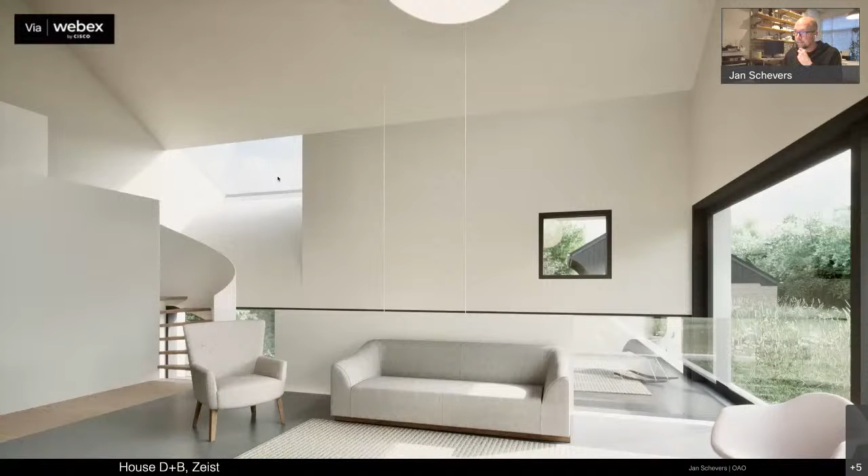But also it allows other ways of letting the light in, by taking that curve and then putting a skylight on top of it. So this is then the living room on half level above, where it's almost like this picture frame, framing a piece of that barn over there, which is actually a window.

And then, you know, the sort of spatial character inside is something that I'm now exploring and seeing, like, okay, does this work now?

So when I showed this to the clients, they were immediately falling in love with the design. They were really happy with it. At the same time, one of the things I'm working on right now, making sketches like this today, is also to get this kind of warm atmosphere in there.

One of the things I'm now seeing these kinds of 3D models do is they allow my clients to be very familiar with what's going on in the project. They know just as much about the project as I do, where before they would sometimes only see it once it was built and realize, this is what you meant with all those drawings. Now I can just send them this as an interactive 3D model on their phone.

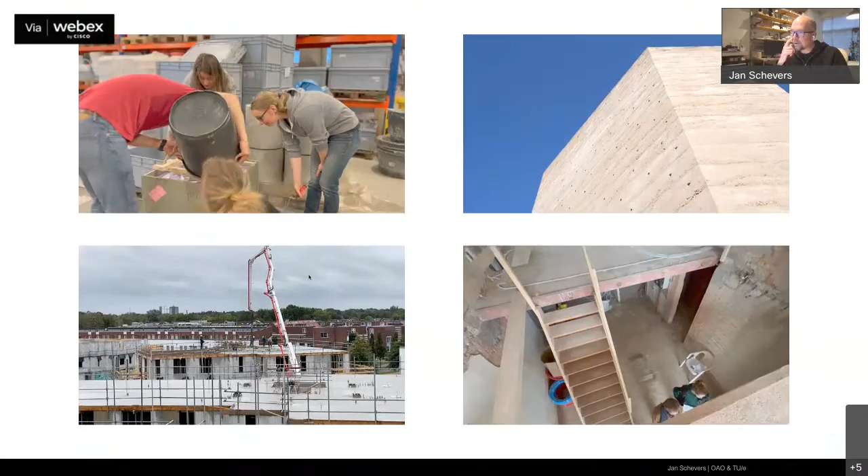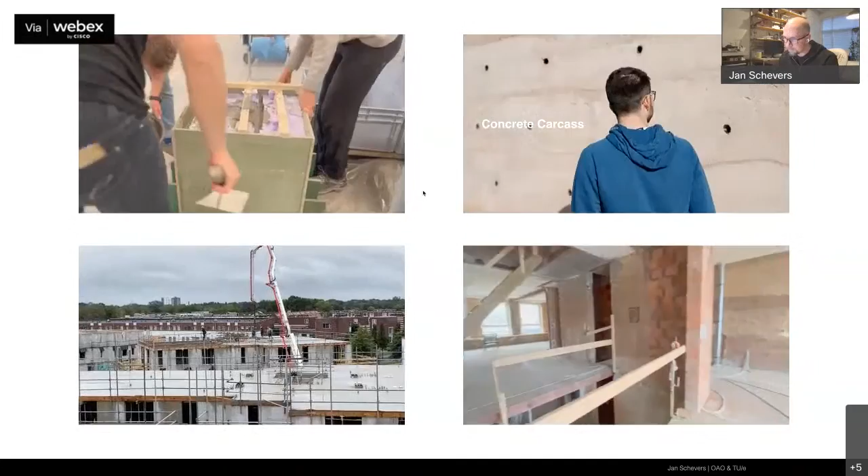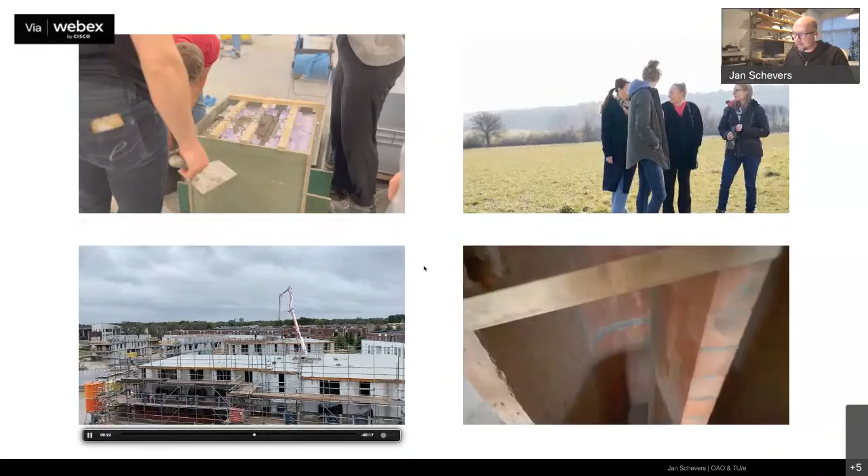Now they're working on what you can see here, like casting concrete models of stuff that they've been researching. And at the same time, in my work, I showed you these private houses. I'm also working on some bigger projects, where they're casting concrete, but then on a slightly bigger scale.

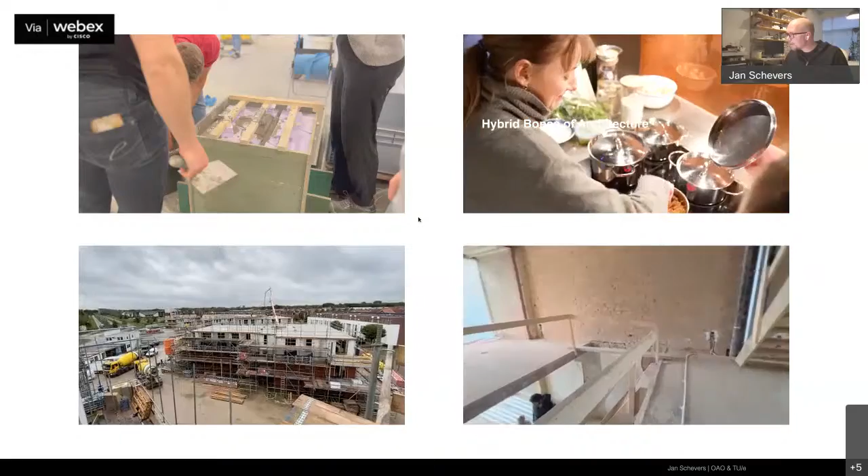At the same time, what you're seeing, I think in a couple of seconds here on the top right, is also doing these kinds of excursions and interviews and things like that.

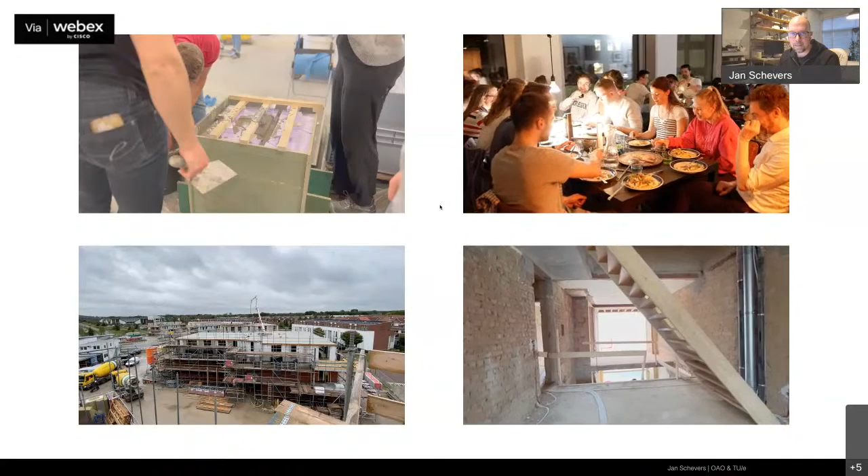On the bottom right, and this is the one I think I'll almost end with, is really being a work in progress over here. This is, I think, maybe I'll do another lecture about this sometime. A project I'm now doing in Antwerp, actually for a colleague of mine, Sergio Figueiredo, who's an assistant professor at our university for architectural theory and history.

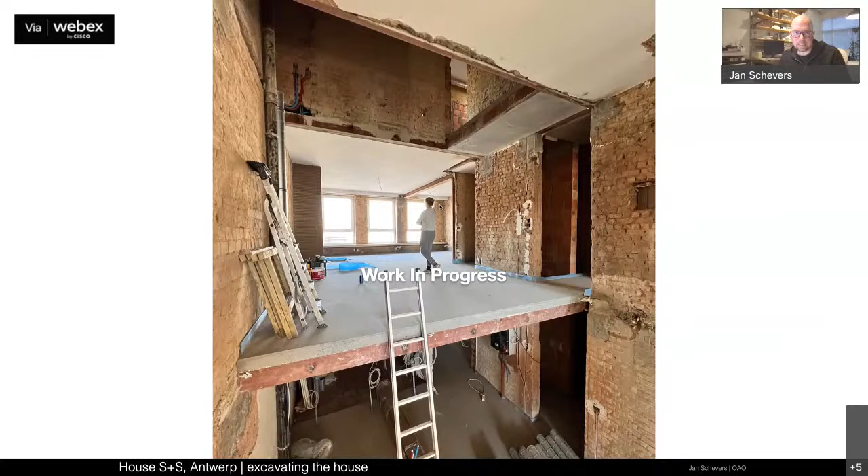He's asked me to design their house, which is, they already bought an existing house. But what we're doing here is more, yeah, I call it excavating the house. So it's not building, almost not building anything, but just taking stuff away and making space. And it's really that making space, giving light to the interior, opening up view lines, that I think is also present in the house I showed before, the one in Zeist, but definitely also here, which creates this kind of very rich spatial atmosphere for people to really feel at home in.

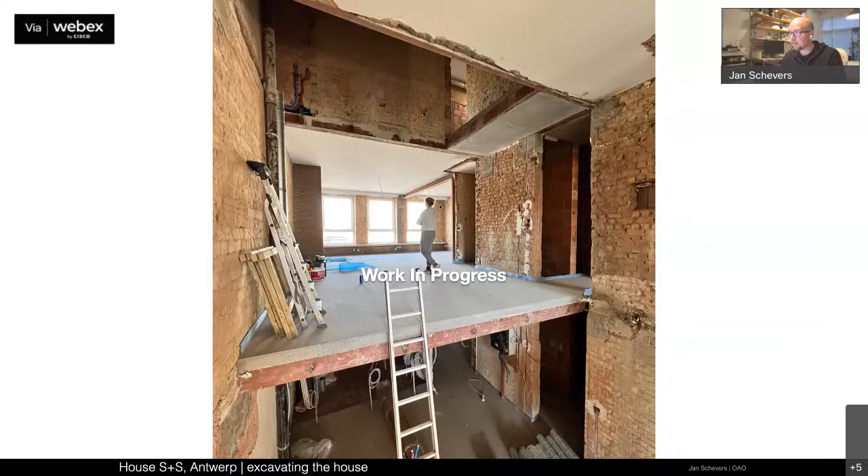So this is something I aim for in projects like this, but also another work in progress is these bigger projects where I find it being a bit more difficult to connect personally, because these are for project developers. There's a lot of people going to be living in there that I've never seen or spoken to. So it requires a bit of a different mindset for me to also be able to emotionally connect to what's necessary there. But I'm having a really great time also designing these kinds of things as well.

So that brings me to my conclusion of the lecture, where I find myself enjoying these kinds of works in progress and the way that everything kind of links together. Yeah, thank you.